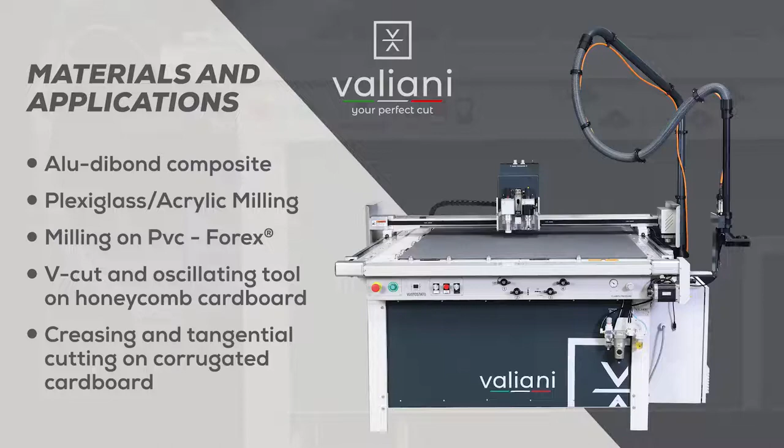It's time to demonstrate the Integra, and Francesco is going to help us again with the demo on the machine. He decided to start with an alu dibond, so he placed the material over the table, turning the suction on, setting the size of the crop marks, and loading the file.

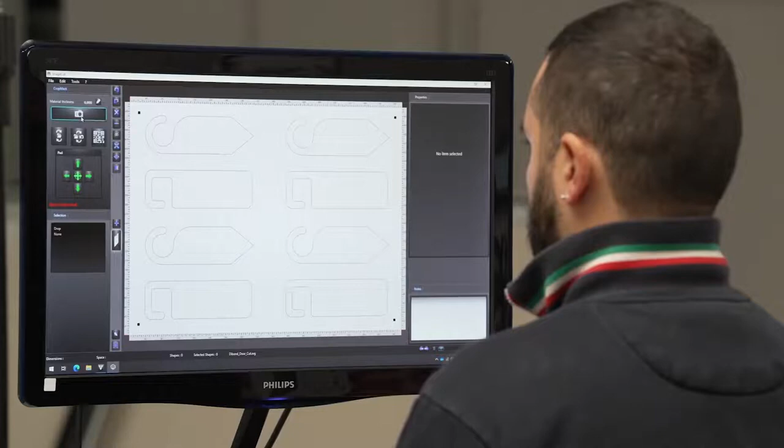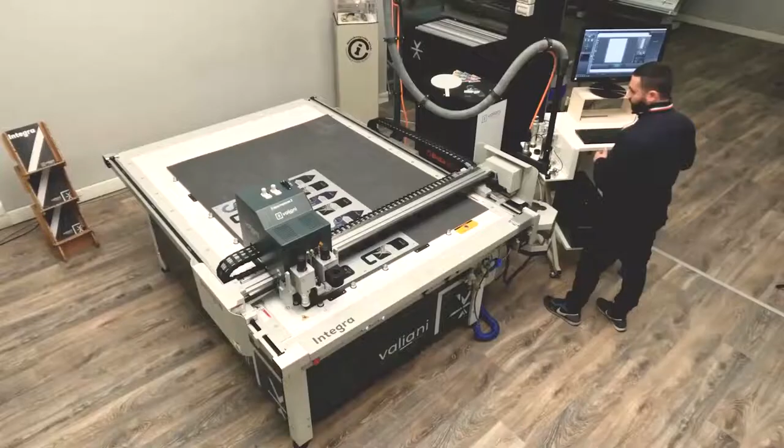Now, the machine will be placed on the first crop mark, acquired as a position to start from, and automatically the machine will start detecting the second crop mark, the third one, and the fourth one in case we have 4 crop marks. Now, to make it simple, this job is divided in 2 parts, bottom and top, and we decided to do only the bottom part.

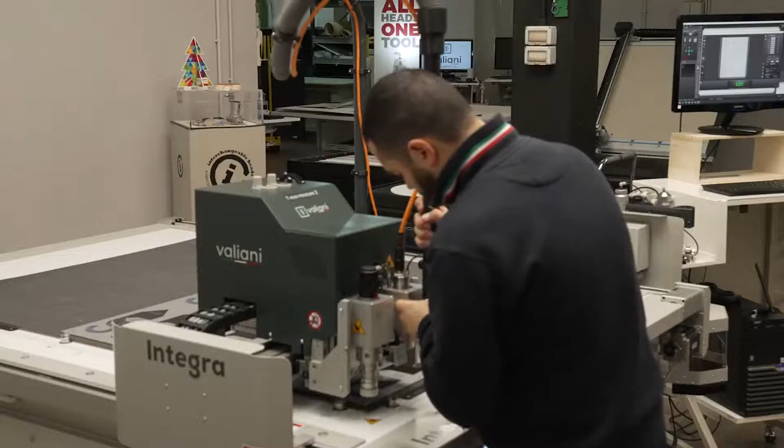Now, we start from a condition that Francesco has to mount the tool that is supposed to do the process, which is the router. See how easy it is to feed the router into the machine. Tool in, up to the end, suction in, tool in, connecting the router into its position, locking the tool, and locking the suction.

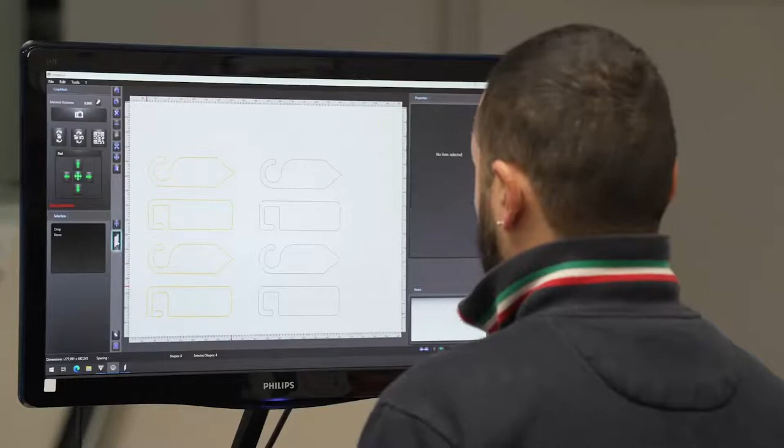Very, very simple. Now Francesco will need to place the suction flange underneath, which works as a protection and to improve the suction of dust that the router will produce. Finally, he's going to mount the safety protection in front of the cutting assembly, the head assembly. Now Francesco is ready to go.

He has already chosen the material, and the tool will go to the far right to measure the length of the cutter. Once the software has determined the right length of the cutter, it's ready to start processing the job. Together with the material, Francesco has already determined the speed of the machine, both the linear speed and the speed the machine will use to plunge into the material.

Now it's only a matter of leaving the machine doing all the contour cut to the door signage. So it's done the 4 jobs which we decided to do, and Francesco turned the suction on, removed one kind of job, cleaned the edges, and showed it to us.

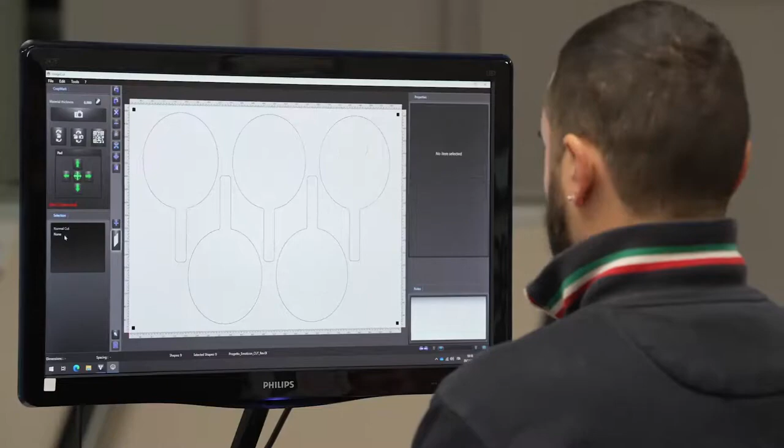The second job of the demo of the Integra is a plexiglass sheet. As for the other one, we still need to use the router. So, simple, importing the file, moving towards the first crop mark, acquiring the position of the first, and letting the machine do the rest with the second, third, and fourth one.

It's important to underline that the job comes from a vector file created with Illustrator, but this could have been done with CorelDRAW or other vector software. The machine has performed, as the first time, the tool length measure, and now it's loading the file. The time it takes to load the file depends on the complexity of the job, so it might differ by a few seconds.

Now the machine is doing the same job, it's milling the contour cut on the plexiglass, starting always from the farthest point to the origin to make the entire process much faster and more logical. So top right, which is the farthest point, moving towards the bottom left. And again, the time it takes depends on the complexity of the job and the number of jobs you have placed on the material.

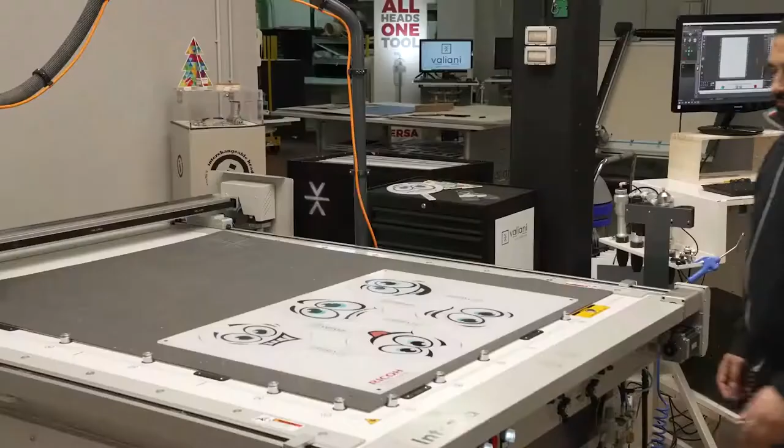Also, the speed of the machine is limited by the material. Not all materials can benefit from the full speed of the machine, because our goal is always to reach the best final result in terms of quality. So we're almost at the end of the performance, and as soon as the machine finishes, Francesco will repeat the same operation, releasing the suction and removing the material. As you can see, the suction has cleaned almost everything, and the table did not show any sign of dust.

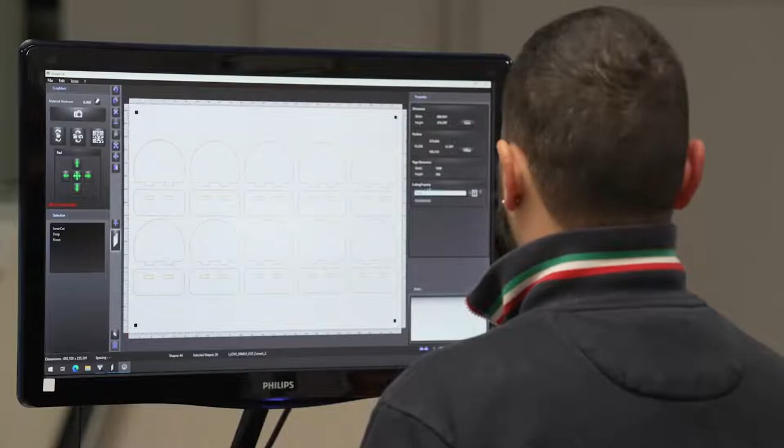The third job we had planned to do with the router is a forex cut. So this is a 1 centimeter forex. Francesco is repeating, loading the file, selecting the diameter of the cutter to perform at its best, setting, as you can see, a kind of tool for the internal process and the external process. And the machine will perform the same operation. Crop marks first, tool length, to be ready to process this small totem.

As for the other one, we will not do the whole job because we want to make this a bit faster and not bother people showing the entire process. And I have to repeat that the speed of the machine follows the material. So we cannot expect to always have the same performance if we want to achieve the best quality of the product.

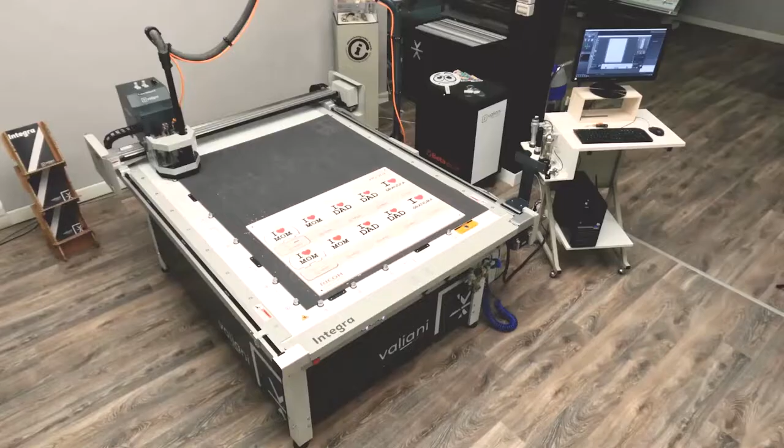Something we have not seen yet is the funnel that controls the suction. Integra has the ability, like every Valiani machine, to open or close zones—see on the bottom right where you have that air tap. Depending on the size of the table or material, Francesco can open more or less zones to get better suction on the material without wasting power on the entire table.

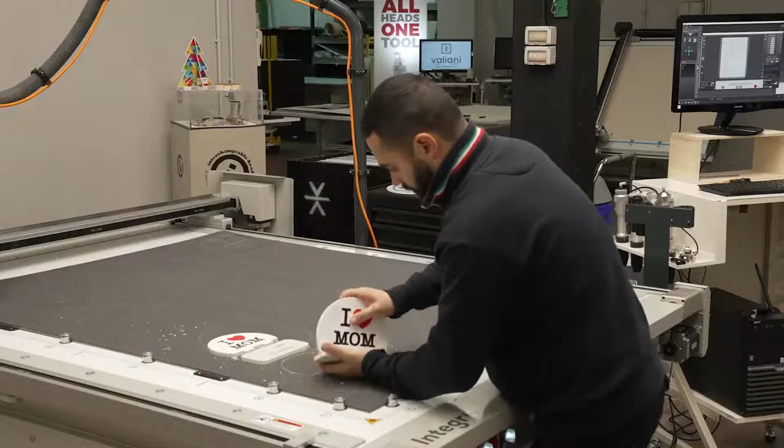The job is done. Francesco is removing all the material, and he's assembled the small totem.

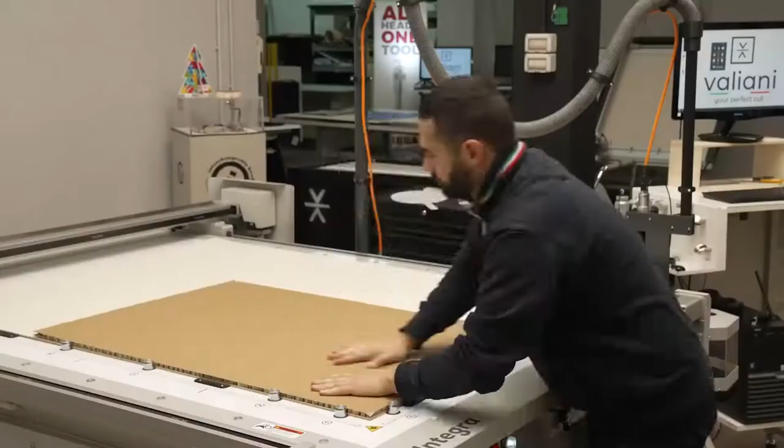The fourth job is being done on honeycomb cardboard. Francesco has changed the slip sheet for better suction and placed the material over the table. Suction on—in this case we're not going to read any crop marks, we're simply going to perform a V cut and a cut through.

The machine will start doing the V cut on each line they are supposed to be folded. This operation, because of the thickness of the material—over 1 centimeter—and the strength of the material, requires a reduced speed.

Then, finally, it will perform the outside cut using the oscillating knife, a tool that allows a high quality result on any thickness up to 2 centimeters. The job is being done.

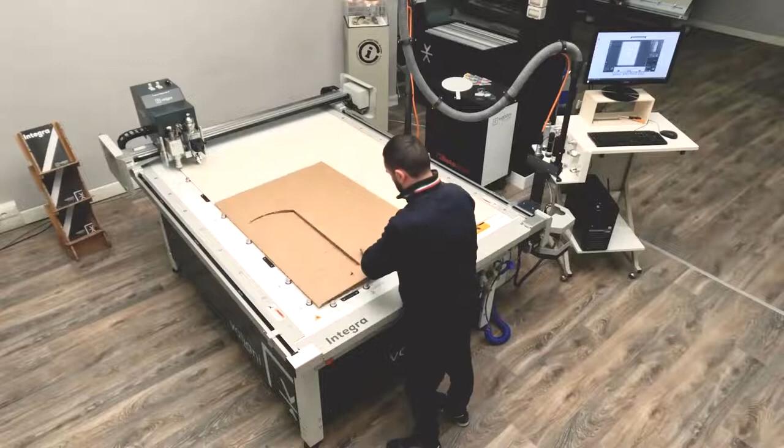Francesco will remove the V cut waste to clean the bottom and the top. Now, once that's finished, it will start folding the POS, the point of sale display. As you can see, it was easier for the machine to cut than to assemble everything.

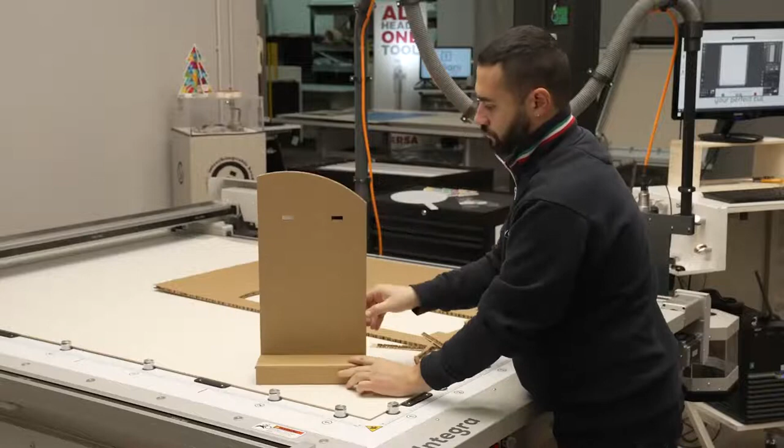That part is done. It's going to place the locker behind, and our point of sales display is ready to go—this could be for production or for a sample to be approved by your customer.

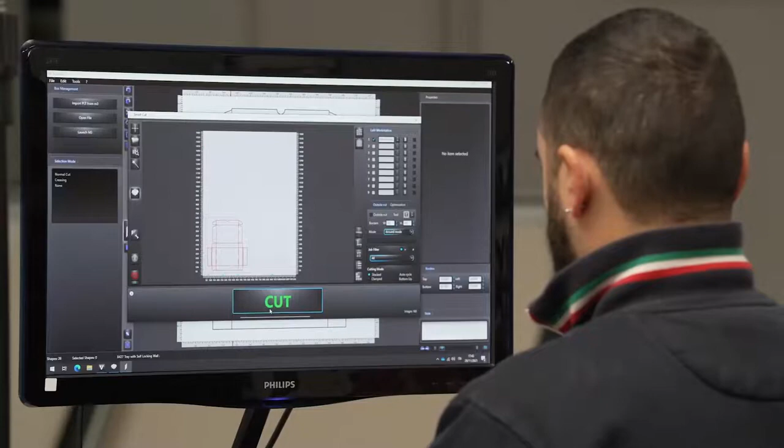The fifth job of the day is packaging. Francesco's turning the vacuum on, suction on, loading the file, which is boxes made of corrugated cardboard. In this case it's a Flute E, so it's roughly 1.8 millimeters thick.

Now we decided to show you how easy it is to completely change the configuration of the machine. We started from the last job where we had the V-cut tool and the oscillating knife. Francesco has removed the first tool and is placing the creasing wheel, locking it in position.

He will repeat the same operation with the oscillating knife—removing it, disconnecting the hoses, and fitting the drag knife, which is more suited for this kind of job and can perform faster. It took him less than a minute to completely change the machine configuration—not an impossible operation, not something that requires hours or particular skill.

Now the machine has been faster than me, and it has already performed the creasing on the material. Now it's time to cut the external shape. With the drag knife we can go full speed, because we don't have to follow the oscillation movement of the other tool.

So at the end, the purpose of this job is to have a sample of boxes, to confirm the good job we've done designing the box from scratch, and to get the approval of the customer. It's almost at the end.